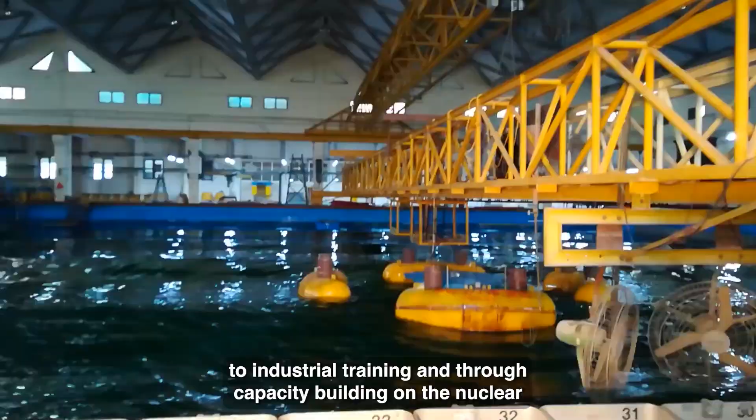This maritime engineering program is very special, with multidisciplinary input from mechanical, civil, structural, aerospace, naval architecture, chemical engineering, electrical, electronics, and applied mechanics. It's a multidisciplinary program, completely different, dedicated to industrial training and through capacity building.

Friends, this is part of the material science engineering laboratory, which becomes one of the teaching aids for the maritime engineering program. When you talk about materials innovation in the maritime industry, concrete and steel have been conventional candidates of choice for engineers, but we also have titanium vessels and high-speed craft boats made of fiberglass. These are all advanced materials which do not come across conventional standard design codes of practice.

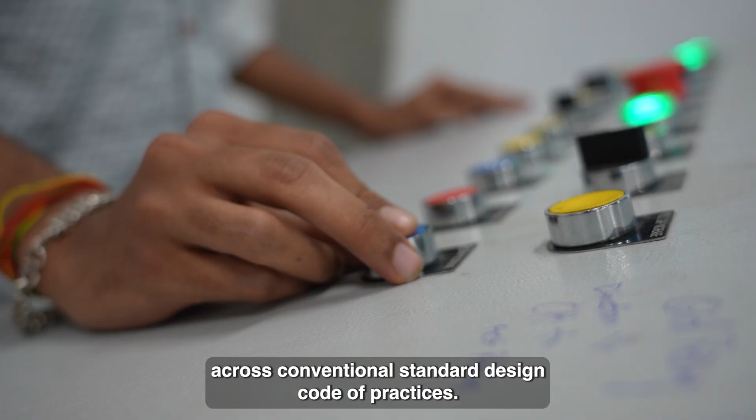We conduct box furnace test, tube furnace test, vacuum arc melting, induction melting, vacuum induction melting, and vacuum sealing unit, all of which are present in this laboratory, a small segment of the material science laboratory.

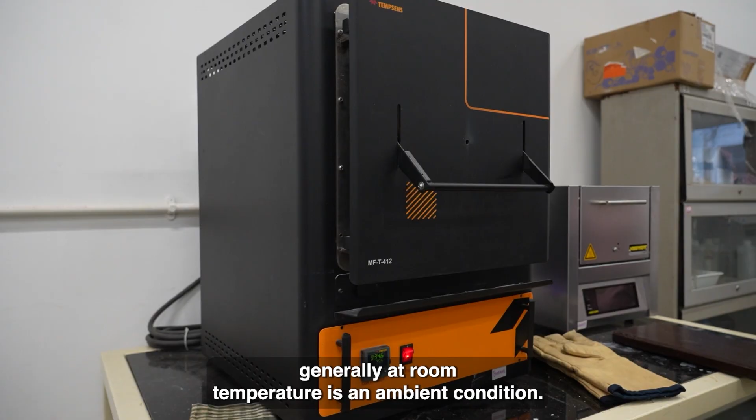Friends, a typical furnace where the operating temperature for testing specimens can go very high. Generally at room temperature and ambient conditions, the mechanical properties will not alter much. As you will see in the course lectures, the strength of the material degrades when the temperature rises beyond 600 degrees Celsius. Therefore, when you talk about fire resistant design, you must choose an alloying element in such a manner that the strength doesn't degrade beyond 600 degrees Celsius at all.

Welcome to the ambience of IIT Gandhinagar Lecture Theatre. This is one of the interesting classrooms where the maritime engineering classes will be conducted. We have state-of-the-art projection facility and good audio-visual recording systems.

Once the lecture is over, you see the system here. We can generate the PDF files of the lecture directly and email them to your email IDs. It's a state-of-the-art facility we have in IIT Gandhinagar where the lectures are recorded for life and shared with students immediately. This is the IIT Gandhinagar library.

This has a collection of books referred to as standard textbooks and references for the course and program. It also has a lot of online editions of design codes of practice, reference materials, and e-collections of various video lectures from international courses and programs related to maritime engineering.

We will be taking you around to the advanced material manufacturing units. So you will have state-of-the-art facilities available at IIT Gandhinagar.

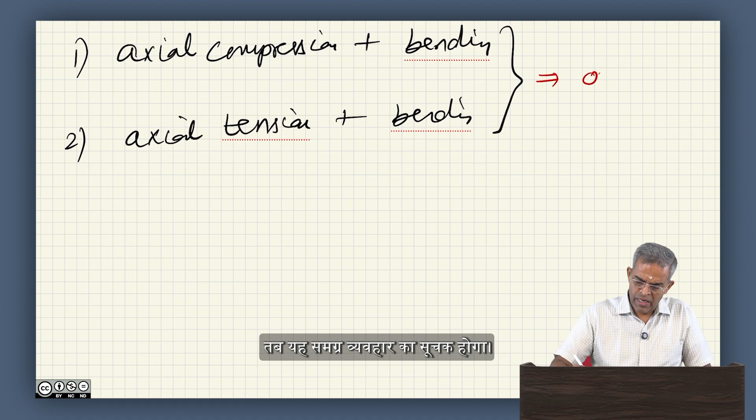Now, let us say when axial compression and bending, case 1, and axial tension and bending act together, case 2, and case 1 and case 2 act together, this will be an indicator of overall behavior. In such cases, we need to do something called a unity check, UC. For this combined loading, we will show how this unity check is done, using the governing equations given by the code.

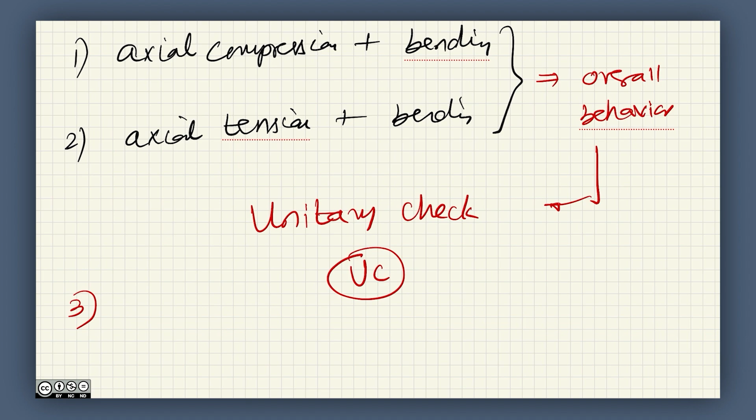However, the interesting factor is when you have axial tension combined with hydrostatic pressure, or axial compression with hydrostatic pressure, this will induce local buckling. So the unity check is related to the local buckling.

We will see a design example of this application. I would give a tutorial where you can try this application, but of course we will discuss the governing equations for all of them in due course in this lecture.

Now let us take a practical case where a combined action can take place. Let us consider a typical jacket, where the legs of the jacket are driven into piles, and this is the ground level. Let us say we know that these legs are braced.

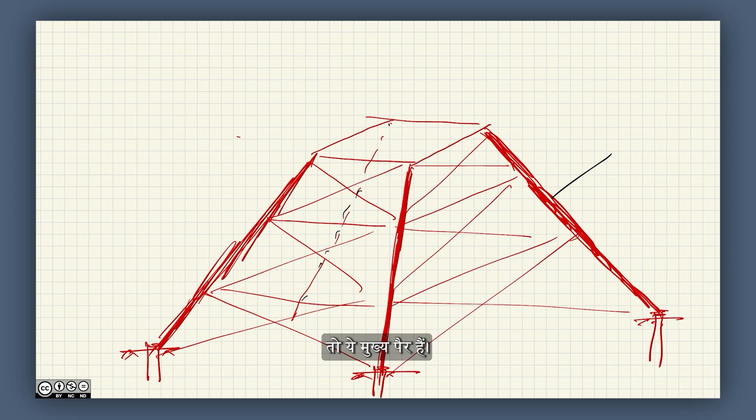So, I am now marking the main legs in a thicker color for our understanding. Now, we can write that these are, of course, there is another leg at the bottom we are not seeing, so we can mark that as well. Okay, so these are main legs, and these are braces.

Let us now mark the axis of reference for our case. Take for example a typical member which I am marking here, this member. Let us take this member for design. Let us mark the axis as x axis, then z axis, and then y axis for our reference.

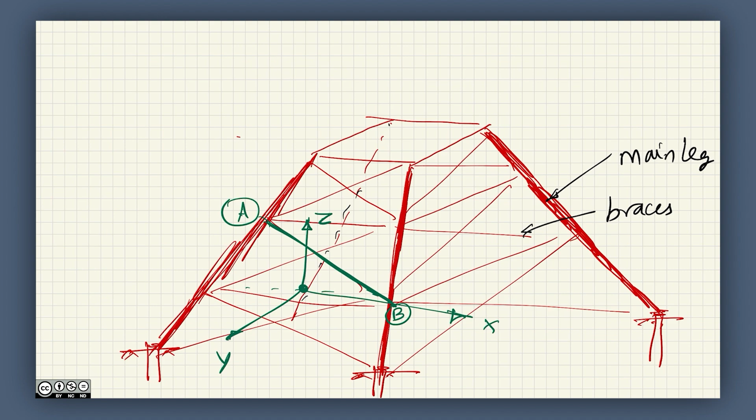Let us look at the brace AB. Okay, we will focus on the discussion, and on the top side there are many, let us say, building blocks, then the electromechanical equipments, living quarters, helipad, and cranes.

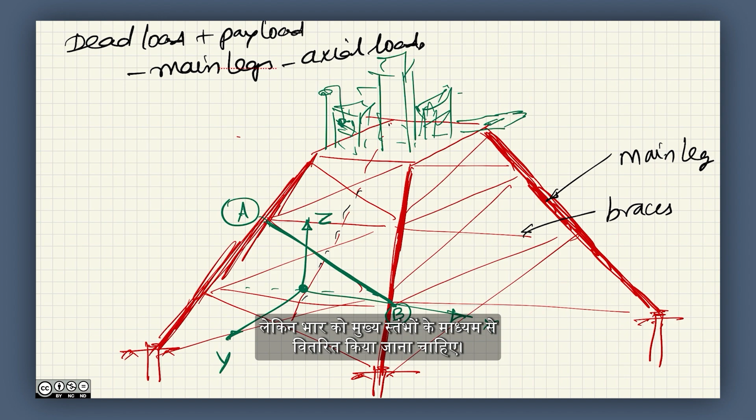All these topsides are going to act on these members and have to be dispersed along the main legs. Now, considering this figure, for the dead load and the payload which is acting on the deck of the superstructure, main legs will be under axial loads, correct? Where the load has to be dispersed through the main legs, the main legs will be under axial loads.

Now, the loads coming on the main legs will be transferred to the braces, because braces are connected to the main legs. In addition, if there are lateral loads acting because of water waves, coming because of wave action, then if the waves are acting along x axis as we see in the figure, the frame will now laterally deflect. Am I right?

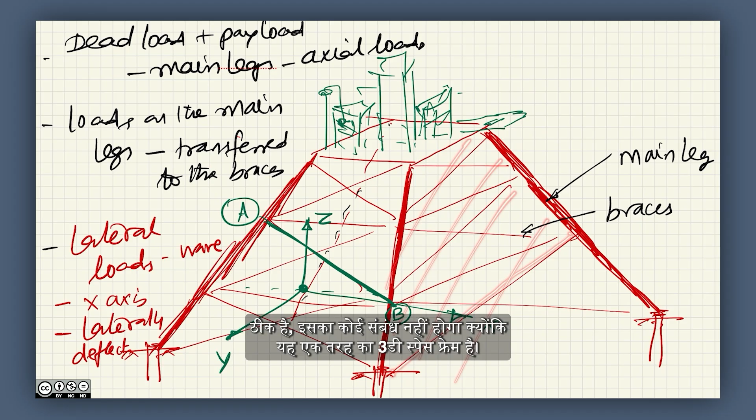Remember friends, these legs are not on the same plane, they are inclined. Therefore, the braces connecting this point and this point will not be on a single plane. There will be inclination of this because it's a 3D space frame sort of a thing. So there is an angle of inclination attached to this connection at this point; everywhere you see they will not be on the same plane. Under this system, the whole frame is now under lateral deflection.

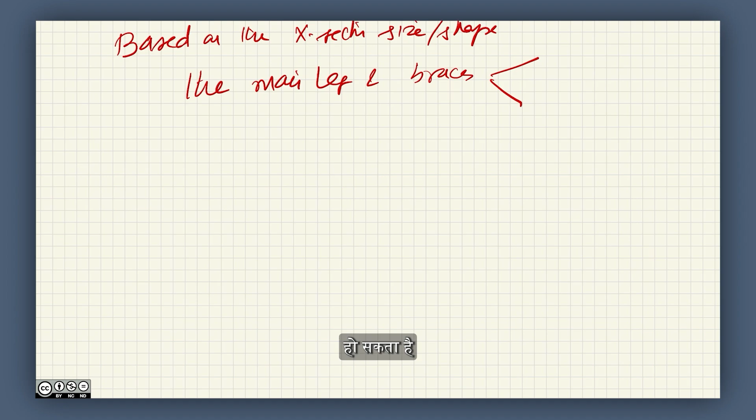Therefore, under this condition, based on the cross sectional dimensions, size, shape, etc., there is a chance that the main leg and the braces may undergo buckling because axial compression is acting, and can also undergo bending because lateral forces are acting. So therefore now I can expect a combination of axial compression plus bending acting on the brace.

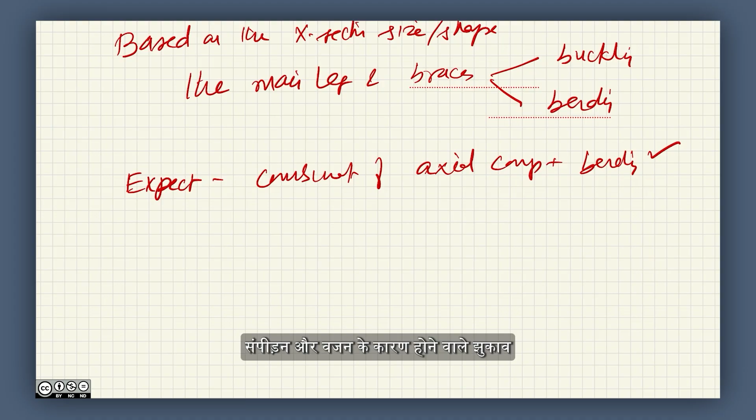So now look at this figure, I am taking moment about y, therefore I can say the braces will be under the combined action of axial compression plus bending My. Now I reverse the wave direction, look at the same figure, now I apply wave direction along y. So for wave direction along y, again the members will be subjected to axial compression because there is a load coming from the top of the deck, plus bending, but this time the bending is Mx, am I right?

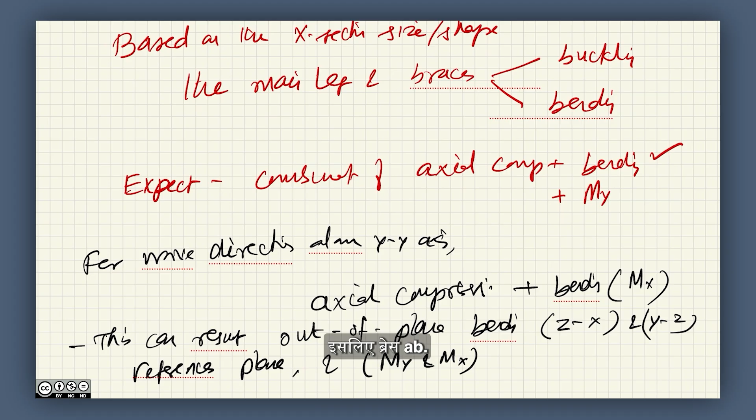So now, as I told you, this brace for example will not be on the same plane. So now this can result in out of plane bending, that is zx and yz are the reference planes, and the moments are My and Mx. Therefore, the brace AB for example, which is on a different plane because this angle of inclination is different, AB is on a different plane now.

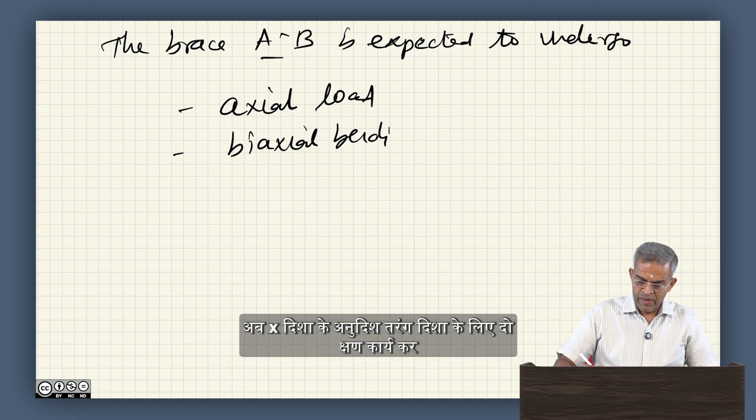So AB is expected to, the brace AB is expected to undergo, there is an axial load transfer from the main leg to the brace, so it will have an axial load. It will also undergo biaxial bending. Friends, why biaxial bending? There are two moments now acting. For the wave direction along x, I get moment about My; for the wave direction along y, I get moment about Mx, right. So there is biaxial bending and axial load, so it is a worst combination now.

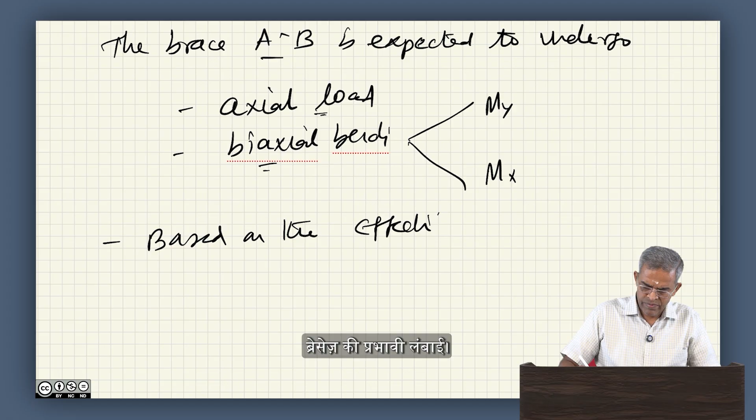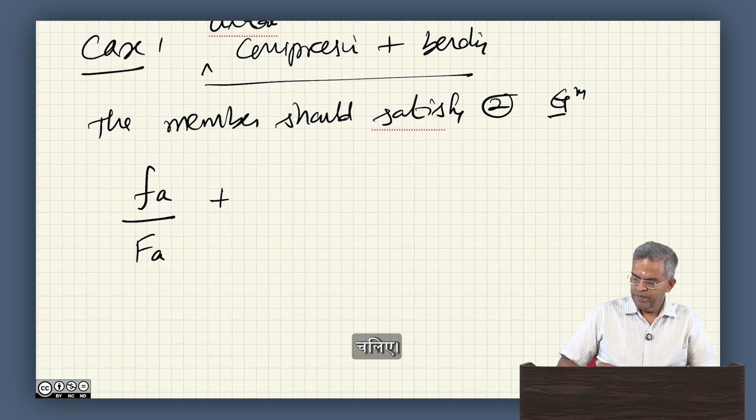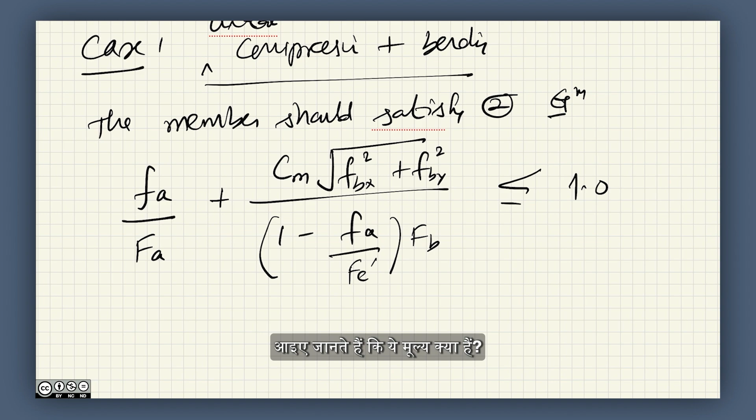Now let us see case 1. Under compression, axial compression and bending, what happens? Under axial compression and bending, the members should satisfy two equations. Let us say what are they? Fa by Fa plus Cm square root of Fbx square plus Fby square by 1 minus Fa by Fe prime times of Fb should be less than or equal to 1. This is called the unity check. Let us see what are these values, what are these Fa's, Fb's, etc.

So this is equation number 1 which is to be satisfied. The other equation which is satisfied is Fa by 0.6 Fy plus square root of Fbx square plus Fby square divided by Fb should be also less than or equal to 1, second equation. So both these equations must be satisfied under axial compression biaxial bending. Okay, now let us see what are these notations, and are we aware about these notations, do we know them? Okay, let us see that.

For example, in the above equation, if Fa by Fa is less than or equal to 0.15, then instead of equations 1 and 2, we can use another equation: Fa by Fa plus square root of Fbx square plus Fby square by Fb, less than or equal to 1. So, friends, we have got 3 governing equations.

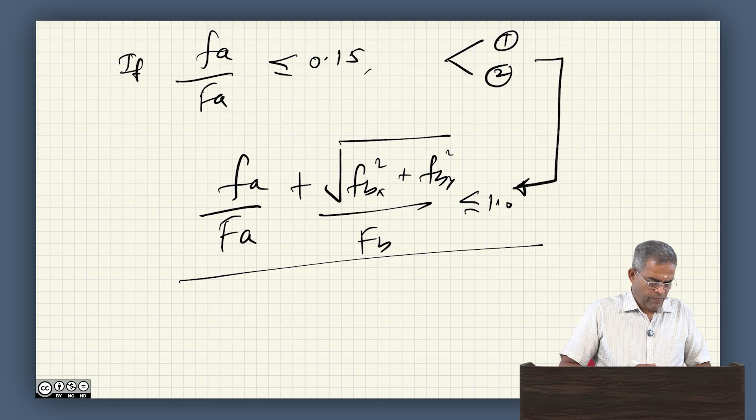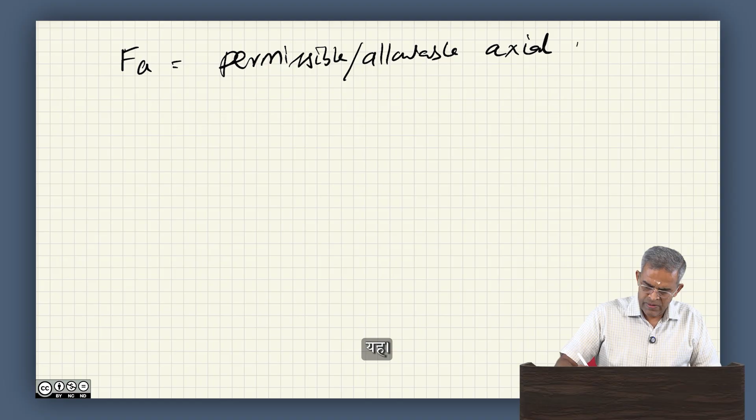Let us see what these values mean. In this equation, Fa is the axial stress in compression, we already know that. Fa is the permissible, or let us say allowable, axial compressive stress. We have already seen in the previous lecture how to compute them.

Small fa is the actual stress, we will see how it is computed. Cm in this equation is called the reduction factor. Reduction factor for various cases are different. Let us say this is as per clause 3.3.1e.

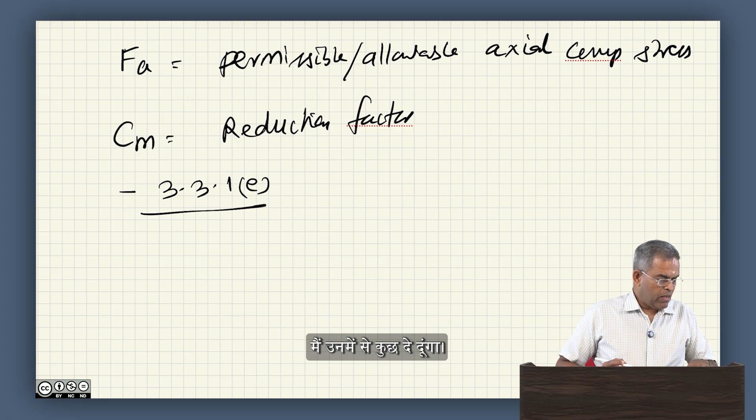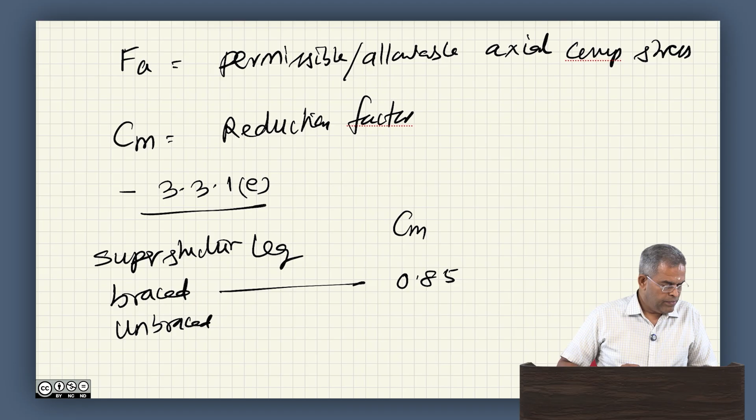I will give a couple of examples. For superstructure legs, when they are braced and when they are unbraced - two conditions. When they are braced, the reduction factor Cm is taken as 0.85. When they are unbraced, again it is taken as 0.85.

There are various forms of the reduction factor which I will write here. Reduction factor can be 0.85 for different applications. It can be 0.6 minus 0.4 times m1 by m2. It can also be 1 minus 0.4 times Fa by Fe dash, or 0.85, whichever is less.

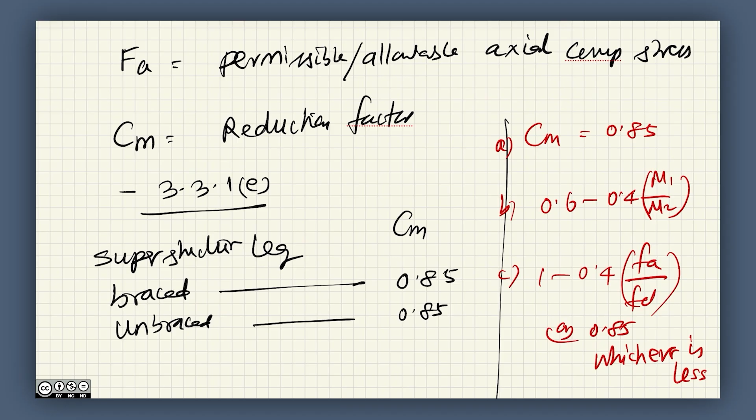So in this equation friends, we know what is Cm, we know what is Fa, Fb, and of course Fy is the yield stress, and Fb is the permissible or allowable stress in bending. We already saw that equation in the previous lecture. So Fb is known, Fy is known, Fa is known, and therefore we can also know the reduction factor which is useful here. Therefore I can try to find out this unity check for a given case if I know the bending stress about two normal axes and the axial compressive stress appearing on this.

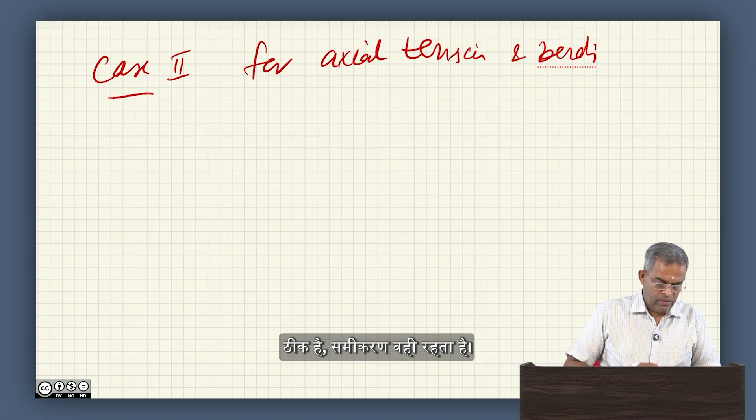In case the system is under case 2, for axial tension and bending, the equation remains the same, whereas Fbx and Fby are computed as tensile bending stress.

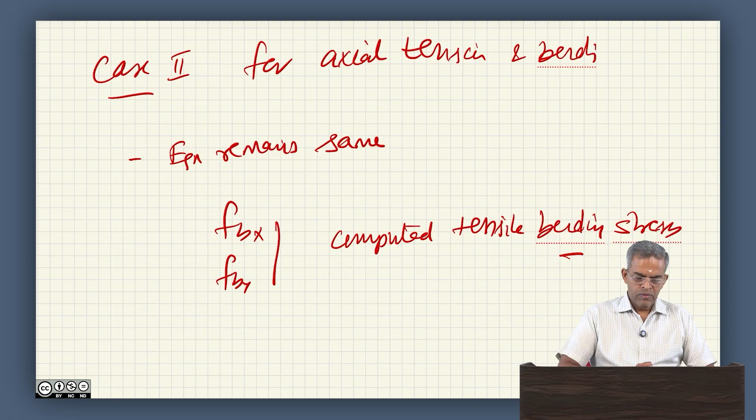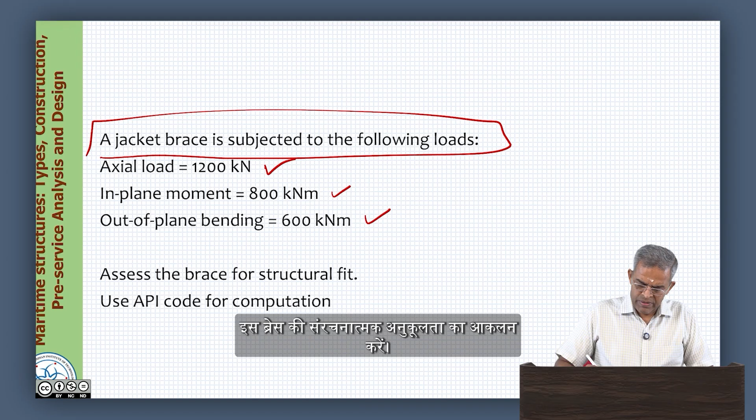Now we will take an example and try to solve this to see how we can use it. A jacket brace is subjected to the following loads: axial load is given, in-plane moment is given, out-of-plane bending is given. Assess this brace for structural fit - that is the question. The data given are as follows.

Let us say the data given: the outer diameter of the brace is 762 millimeters. You may wonder how this fraction is coming - actually these dimensions are in inches, so when you convert them to millimeters you get a fraction like this. Thickness, t, is 15.88 mm. This is D for our nomenclature, we know that.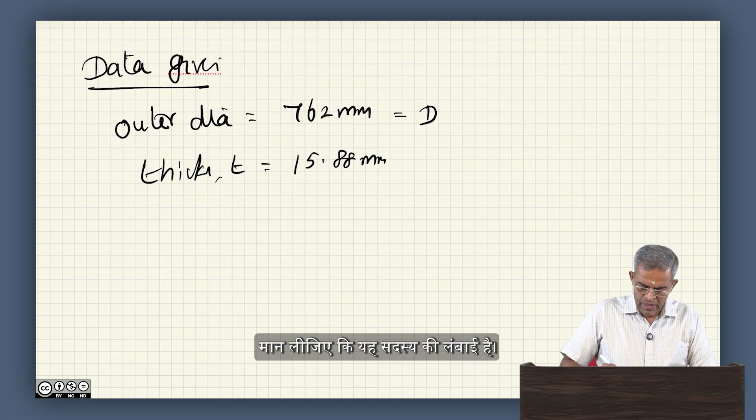Let us say the length of the member, this unbraced length of the member which is L, taken as 15 meters, small l. We take Fy as 345 megapascal, which is the same as Newton per mm square. And we take modulus of elasticity as 2 into 10 power 5 Newton per mm square. Now for the brace connection in the problem, we take the K factor as 0.9.

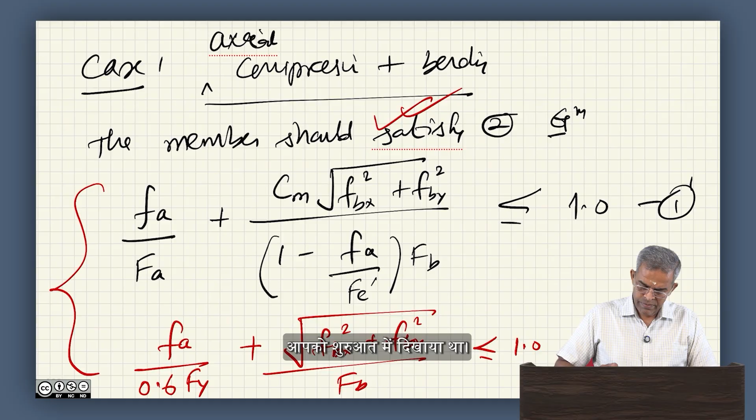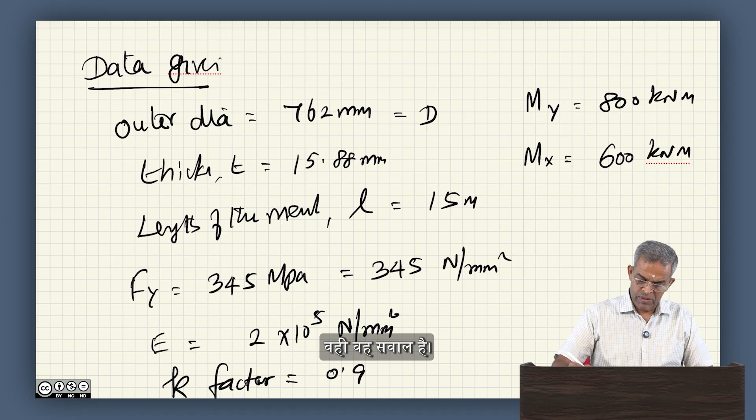Let us check whether this brace is structurally fit - that is the question. So step number 1, let us do the geometric properties. Let us compute the area. You know, for a tubular member, the area is given by pi d square by 4. So now I can substitute this: 762 minus 730.24, because 15.88 is the thickness. Please compute this, friends - I am getting this as 3.72 into 10 power 4.

Let us find out the moment of inertia about the bending axis I, which is pi by 64 d power 4. Okay, so I substitute them.

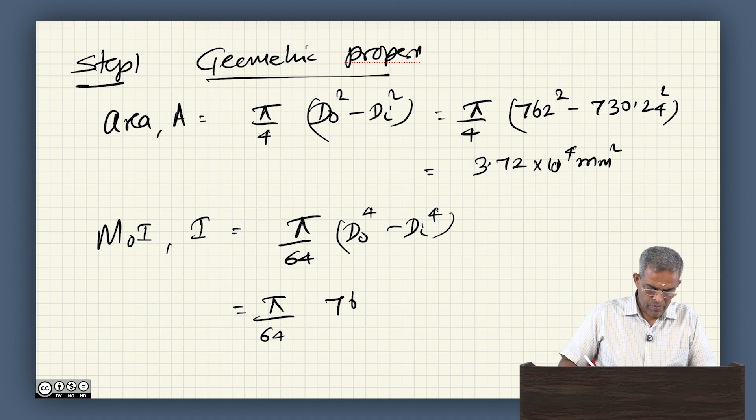I get this value as 2.59 times 10 power 9.

Now I compute something called section modulus, which is Z, which is I by Y max, is it not? I have a circular member, I have the outer diameter, I have the centroidal axis, I am looking for Y max. So I could now say it is going to be 2.59 times 10 power 9, that is my I value. Y max, can I say it is d by 2? So if we substitute that, 2.59 times 10 power 9 by 762 by 2, I get this value as 6.8 times 10 power 6 mm cube, that is my section modulus.

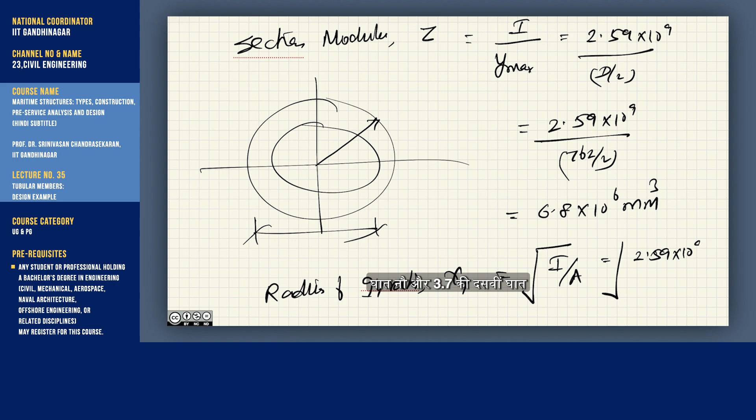Then I find out radius of gyration, which is square root of I by A, which is going to be square root of 2.59 times 10 power 9 by 3.72 times 10 power 4, that is the area, right? Square root of that, I get this value as 263.86 millimeters.

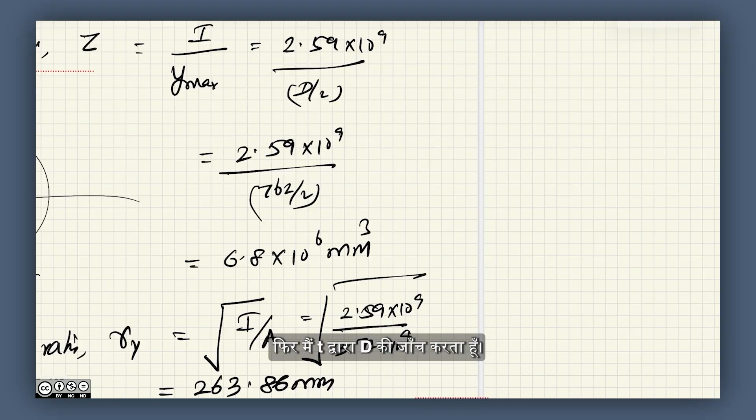Then I check d by t, that is very important for us. So d by t check, it is 762 by 15.88, it is 47.98, less than 60, so I can use specific set of equations. This is required because the equation changes, we already seen that.

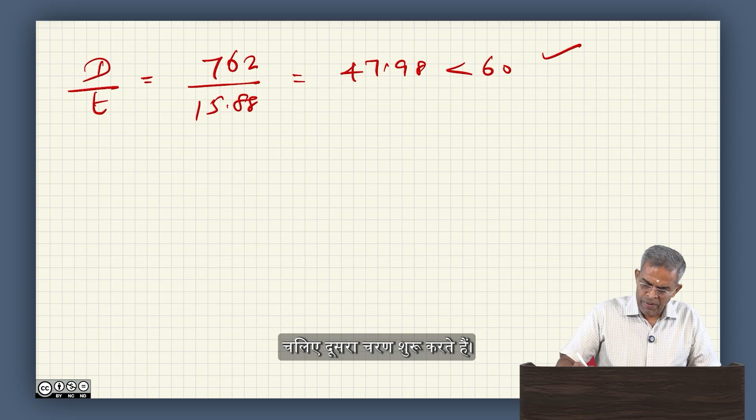Let us do step number 2. In step number 2, we will try to find out under axial compression, column buckling, what is the allowable stress. So for members whose d by t is less than 60, the allowable compressive stress, please refer to your notes.

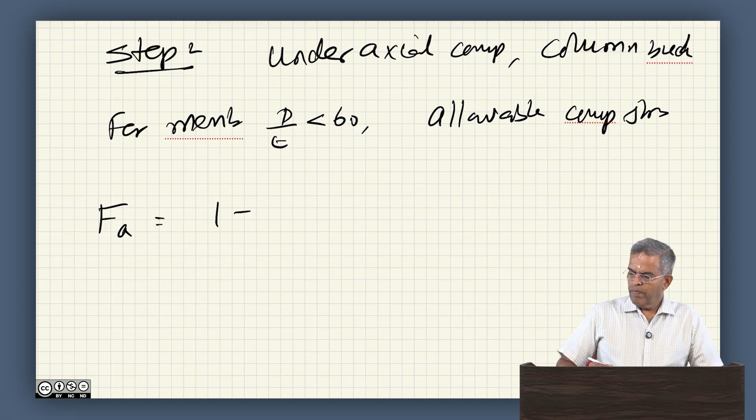I am writing the equation, given as Fa equals 1 minus KL by R the whole square divided by 2 Cc square, divided by 5 by 3 plus 3 KL by R by 8 Cc minus KL by R cube by 8 Cc cube. This is true for KL by R less than Cc, is it not?

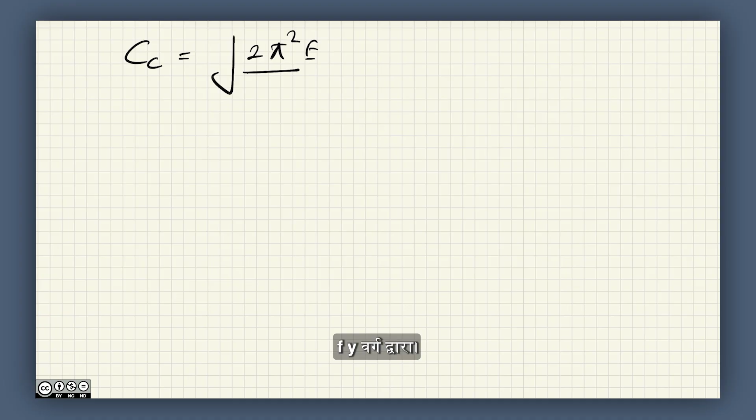Let us first compute Cc in our case. Cc is going to be square root of 2 pi square E by Fy. So square root of 2 pi square into 2 into 10 power 5 divided by Fy, which we have taken as 345. I get this value as 106.92, you can please check.

Let us also try to find out KL by R. In my case, I have taken the reduction factor as 0.9 and L is 15 meters, so many millimeters, and R we computed as 263.86, which is coming to be 51.16.

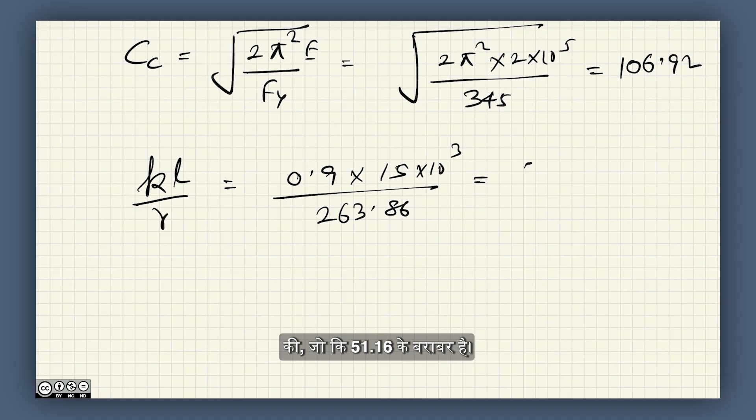Now, since KL by R is less than Cc, I can use this equation. This equation is only valid for this condition. So I have checked it, it is okay. I am going to use this equation and substitute.

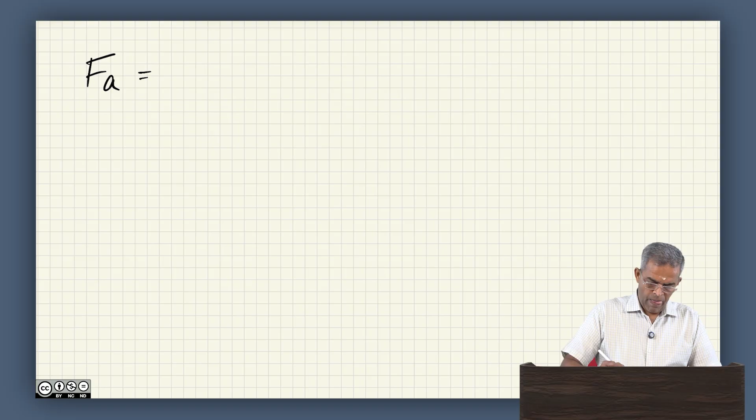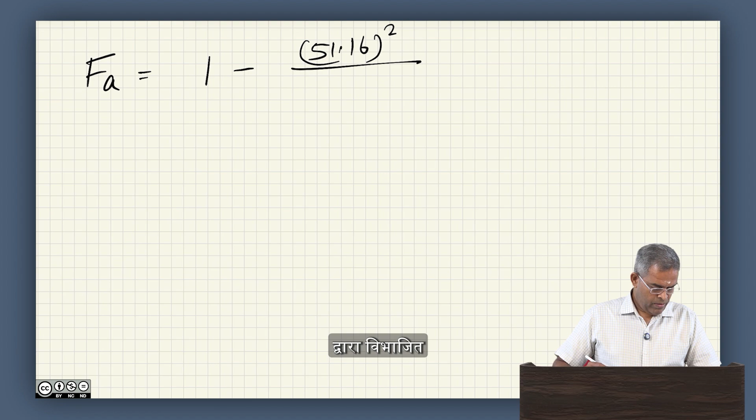So now I can find Fa as 1 minus 51.16 square, that is KL by R square, divided by, okay there is an Fy here, I think we have written it there, please understand there is an Fy here, divided by 2 times of Cc square, it is 106.92.

Into, of course, 345, that is Fy, divided by 5 by 3 plus 3, KL by R we know which is 51.16, and we also know Cc, so 8 into 106.92, minus 51.16 cube divided by 8 times of 106.92 cube.

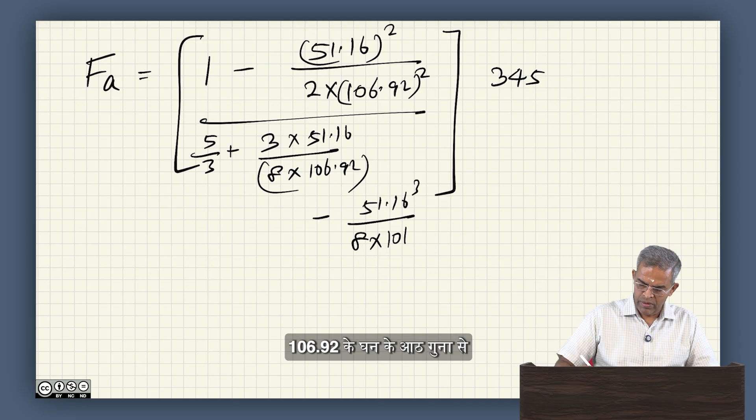Substitute this and try to see, I get this value as 166.72 megapascal.

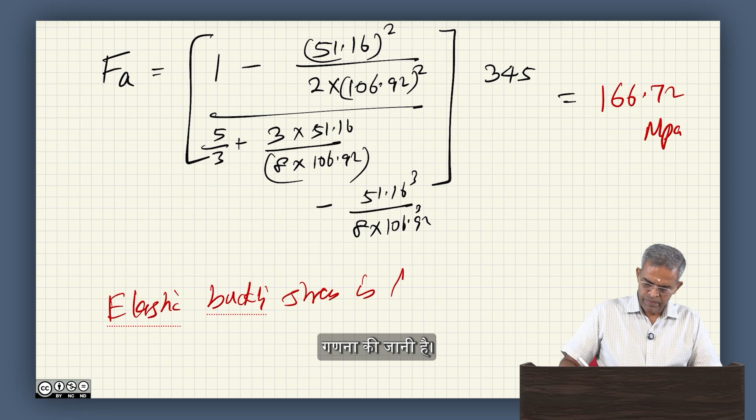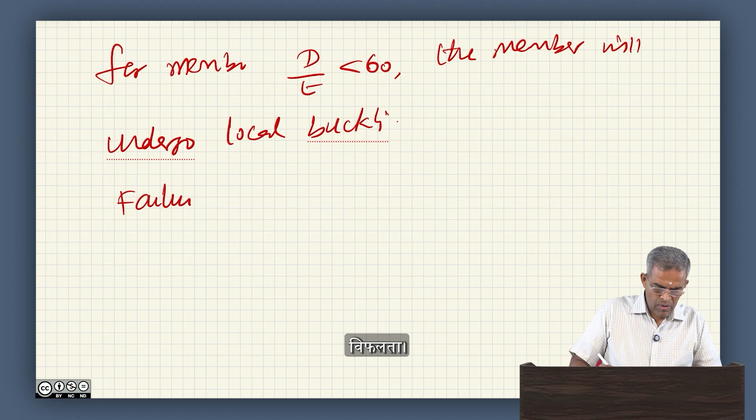Now the elastic buckling stress is to be calculated, because we must know whether the system is going to be inelastic or elastic. So why do we know this? Let us understand. For members whose d by t is less than 60, the member will undergo local buckling. The failure will be preceded by local buckling before it fails in column buckling mode. That is very important.

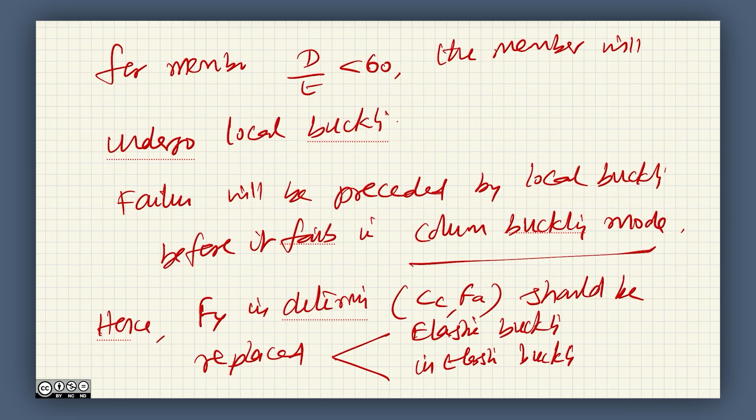Hence, Fy in determining Cc and Fa should be replaced, because I am focusing on local buckling. It should be replaced either by elastic buckling stress or by inelastic buckling stress, whichever is lesser. So let us compute that now.

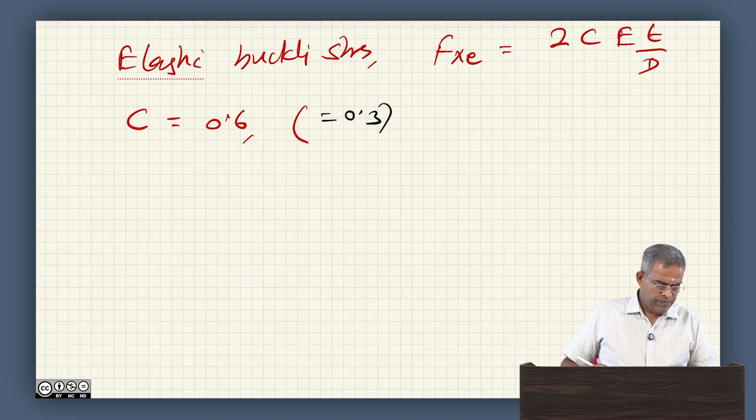So the elastic buckling stress, which is Fxe, is given as 2 C E T by D, where C is generally 0.6, but literature advocates this to be 0.3, because to account for local imperfections.

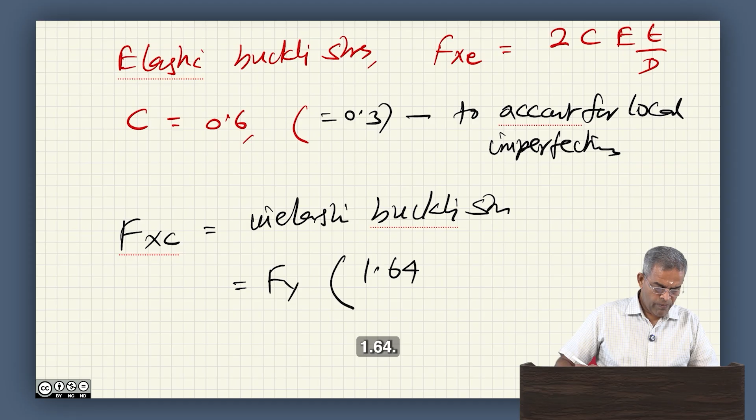And Fxc, inelastic buckling stress, is given as Fy times of 1.64 minus 0.23 times of d by t to the power 0.25, and of course this is to be limited within Fxe. And Fxc is equal to Fy for d by t greater than 60, less than equal to 60.

So let us see for the present case what happens. For the present case, we find Fxc. Let us first find Cc. Cc is 106.92, we computed that, right? We compute Cc. Oh, we are going to compute that, right?

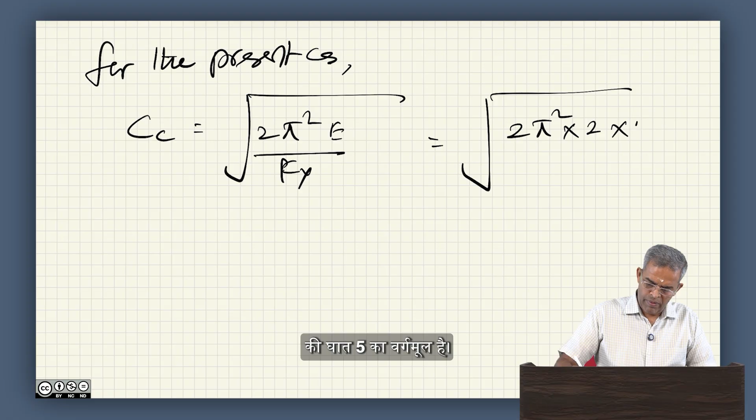Let us do this. Cc is going to be square root of 2 pi square E by Fy, which is square root of 2 pi square, 2 times 10 power 5, by 345, which says 106.9. Then let us know the KL by R value, which is 51.16, we already computed this.

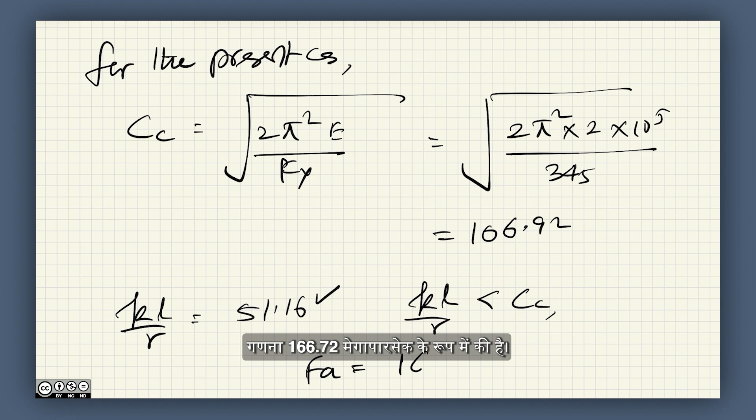Since KL by R is less than Cc, we have computed FA as 166.72 megapascal. We did that, right? See here, FA we computed. I am writing it here. We computed this. Now let us compute the elastic buckling stress.

Fxe is 2 C E T by D, which I say, I am using 0.3, and E is 2 times 10 power 5. Thickness we already know is 15.88, and D we already know is 762. So this comes to 2500.78 megapascal, accounting for geometric imperfections.

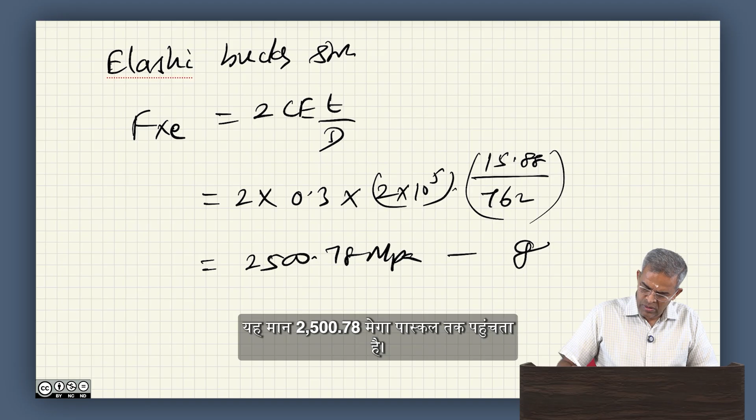For D by T less than 60, Fxc is Fy, which is 345 megapascal. Okay, so now let us prepare the allowable bending stress.

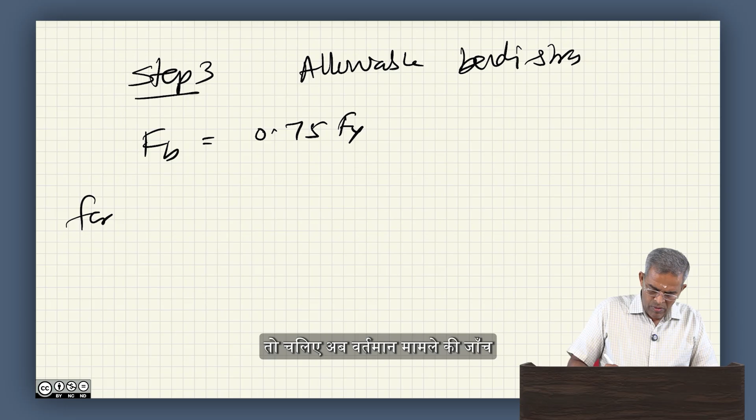The allowable bending stress Fb is given as 0.75 Fy or other equations depending upon the case. So, let us check the case now. For the present case, let us say 10,340 by Fy less than 762 by T less than 20680 by 345. That is the case.

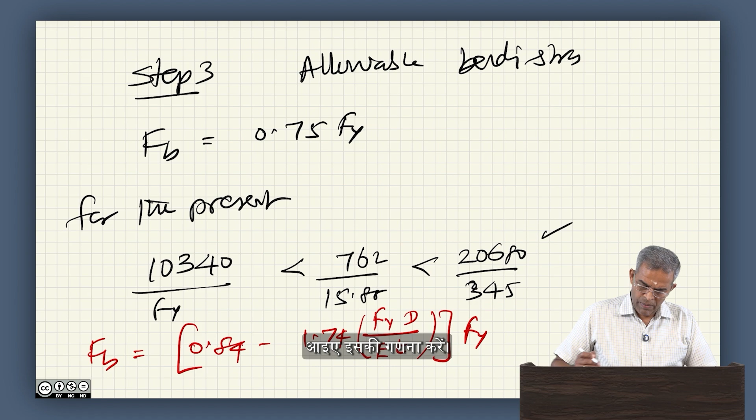So, for this specific case, Fb is given by this equation: 0.84 minus 1.74 times of Fy d by E t, times of Fy. Let us compute this. Please substitute this, which comes to be Fb is equal to 0.84 minus 1.74 times of 345 into 762 by 2 into 10 power 5 into 15.88 of 345, which comes to 240.1 megapascal.

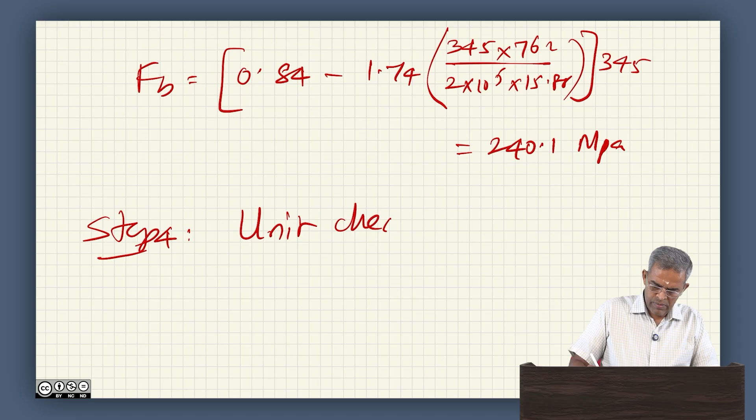Now, let us apply the unit check. The unit check 1 says Fa by Fa plus Cm times of Fbx square plus Fby square divided by 1 minus Fa by Fe dash times of Fb should be less than or equal to 1.0, right.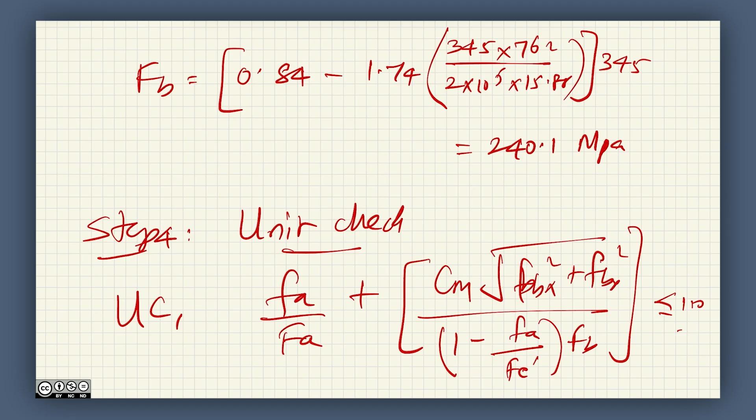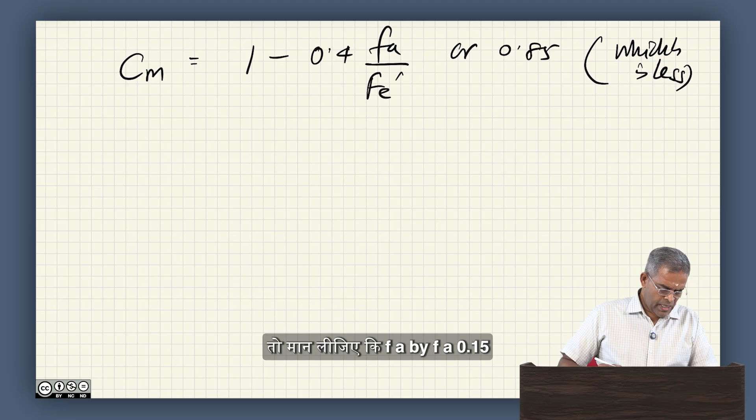Let us first compute Cm, given as 1 minus 0.4 times of Fa by Fe dash or 0.85, whichever is less. So, let us say for Fa by Fa less than 0.15, we can apply a single check. We already saw the equation. Let us see what is the present case.

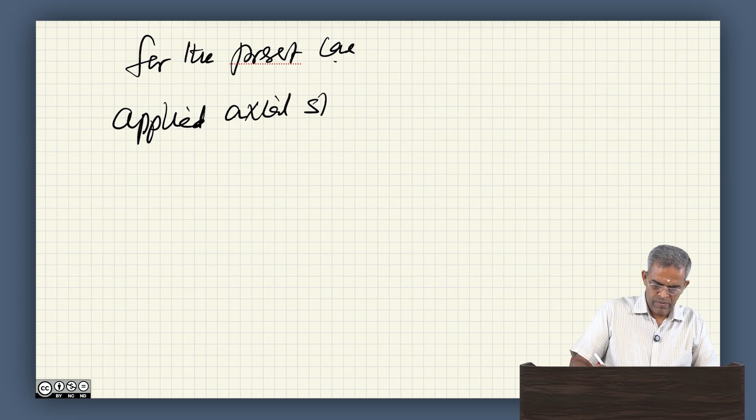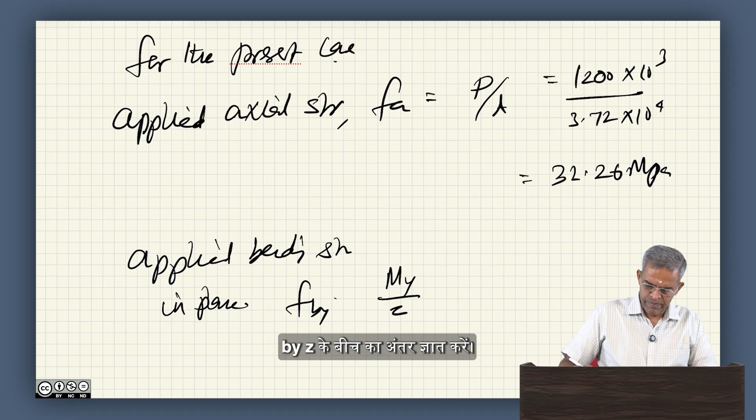The applied axial stress Fa is P by A. So, P we know is 1200 into 10 power 3 newtons, A we know is 3.72 into 10 power 4, which comes to 32.26 megapascal. The applied bending stress, let us work out in plane, which is Fby, which is My by Z, which is 800 into 10 power 6 by 6.8 into 10 power 6, which is 117.64 megapascal.

Out of plane stress Fbx is Mx by Z, which is 600 by 6.8 into 10 power 6, which is 88.24 megapascal. So, now let us compute Fe prime.

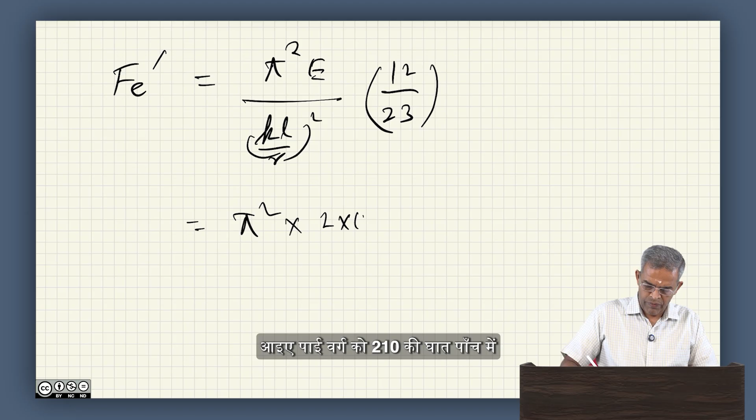Fe prime is given as pi square E by KL by R square into 12 by 23. Let us compute that. Pi square into 2 into 10 power 5 by 51.16 square of 12 by 23, which is 393.1 megapascal.

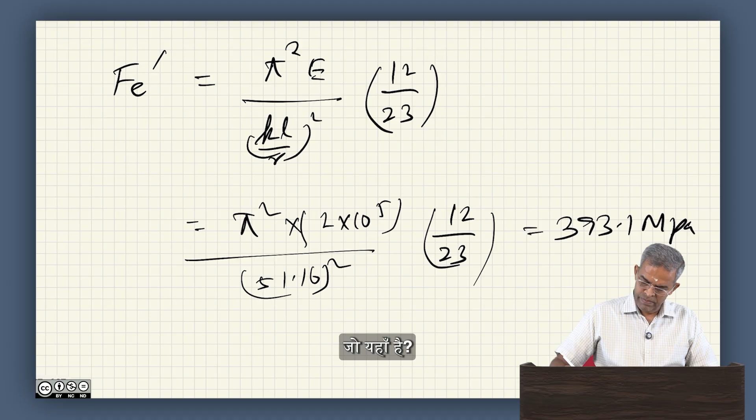So, now in the present case, Fa by Fa, which is 32.26 by 166.72 is 0.19, it exceeds 0.15. So, I must use two conditions, and therefore, Cm now becomes 1 minus 0.4 times of 32.26 by 393.1, which comes to 0.96, but it cannot be more than 0.85.

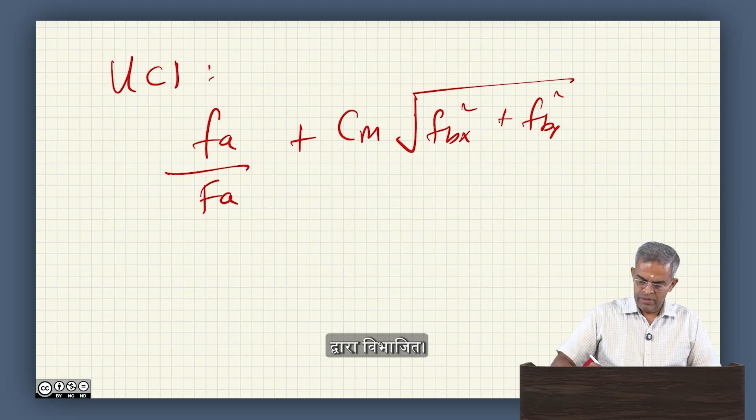So, let us do UC1. The unity check 1 says Fa by Fa plus Cm times of Fbx square plus Fby square divided by 1 minus Fa by Fe dash of Fb should be less than or equal to 1.0. Let us substitute this, which becomes 32.26 by 166.72 plus Cm is 0.85, there is a limiting factor, square root of 117.64 square plus 88.24 square. We computed these values here, please see.

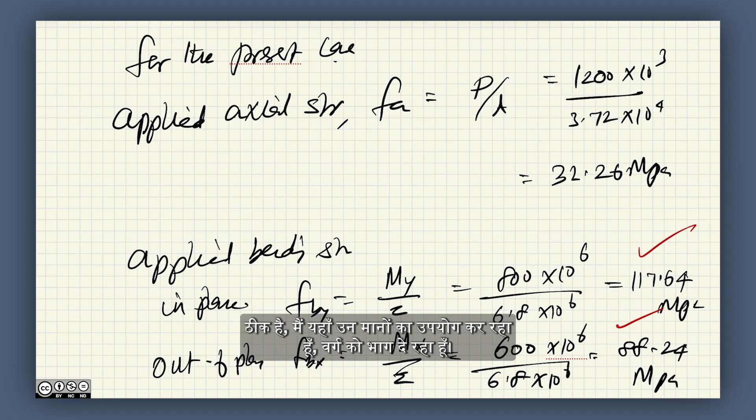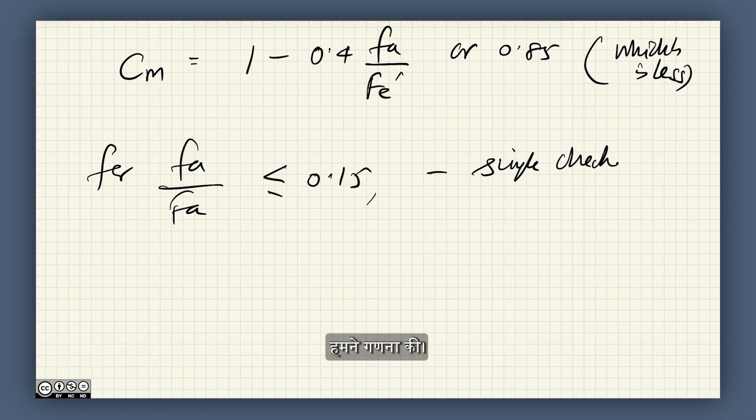Okay, I am using those values here. Square divided by 1 minus 32.26 by 166 point, not this, Fe prime, which is 393.1, times Fb, which is 240.11. We computed that, right? See here, Fb we computed, bending stress. So, now I compute this value and found to be 0.76 less than 1. So, I can say the brace is safe.

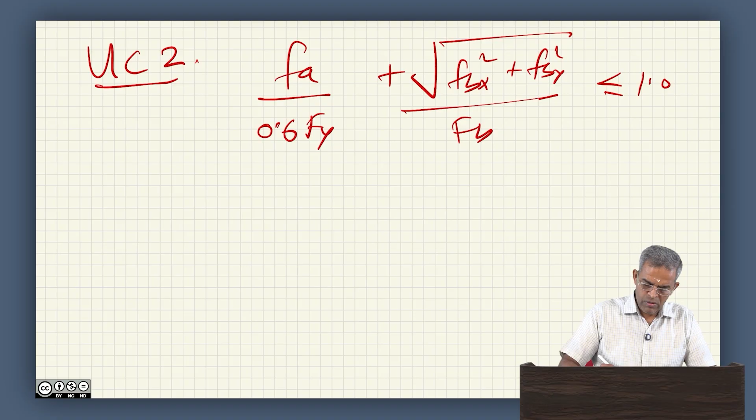Let us do unity check 2, UC2. The second condition says Fa by 0.6 Fy plus square root of Fbx square plus Fby square divided by Fb should be less than or equal to 1.0. Let us substitute that. So, 32.26 by 0.6 of 345 plus square root of 117.64 plus 88.24 divided by 240.11, and that value comes to be 0.76 less than 1. So, the brace is safe in both conditions.

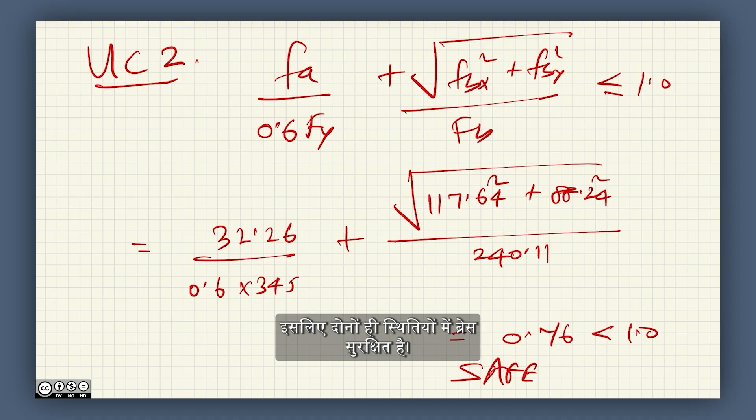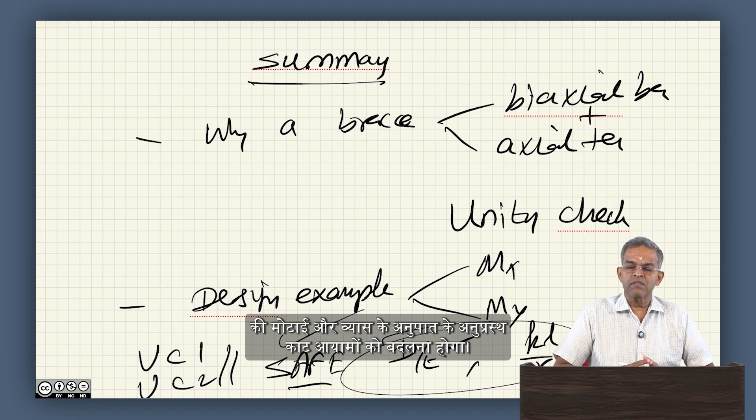So, friends, let us come to the summary of this lecture. We understood why a brace will be under biaxial bending and axial tension combined together, and how to perform the unity check. We illustrated a design example of a brace subjected to both Mx and My, in plane and out of plane bending, for a given d by t and KL by R ratio. We used the equations and checked unity check 1 and unity check 2, and found the brace is safe. If by chance the brace becomes unsafe, you have got to change the cross sectional dimensions, thickness and diameter ratios, or select an upper grade of steel. In this case, we took a steel Fy of 345; we can go for a better grade of steel and so on. Probably you will be able to revise this design example once again for other substituted values. Try to use the codal example and these equations and check yourself. One can also write a simple MATLAB program for finding this unity check faster, to reinforce your understanding. Thank you very much.